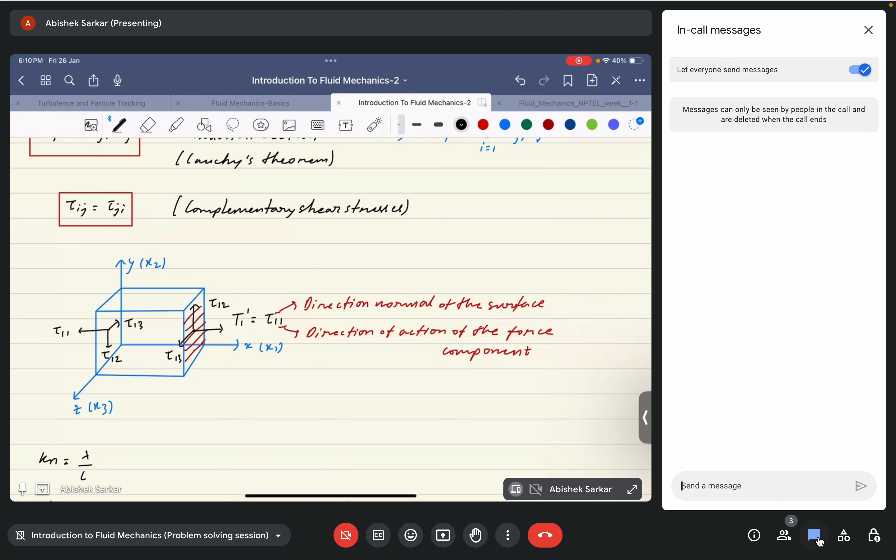So, to begin with, Professor Chakraborty discusses the topic of... let me go back to the notes, I guess that would be better. Okay, yes, so here you can see that...

For the beginning, Professor Chakraborty has discussed the concept of continuum hypothesis, which basically helps us to consider the fluid as a continuum. If we dive deep into the physics of fluid flow, we can consider fluid to be comprised of various fluid particles. Fluid particles basically imply an accumulation of certain fluid molecules that would comprise a particle small enough to mitigate the errors that may arise because of its largeness.

If the fluid particle is much larger than the size chosen for our calculations, say the calculation of intensive properties such as density, mass per unit volume, then the size of the fluid particle should be small enough so that errors related to measurement of densities are mitigated, while also being large enough so that the continuum hypothesis is satisfied.

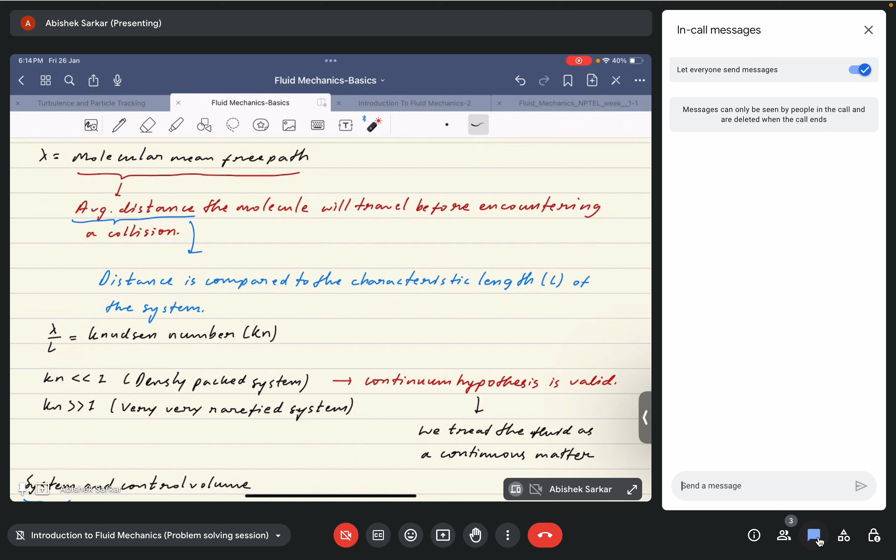The mean free path, or molecular mean free path, refers to the average distance that a fluid molecule will travel before encountering a collision. The characteristic length scale is the length scale of the flow that governs flow properties such as velocity and pressure. It could be defined as a length scale along which there is a considerable change in the velocity of the flow.

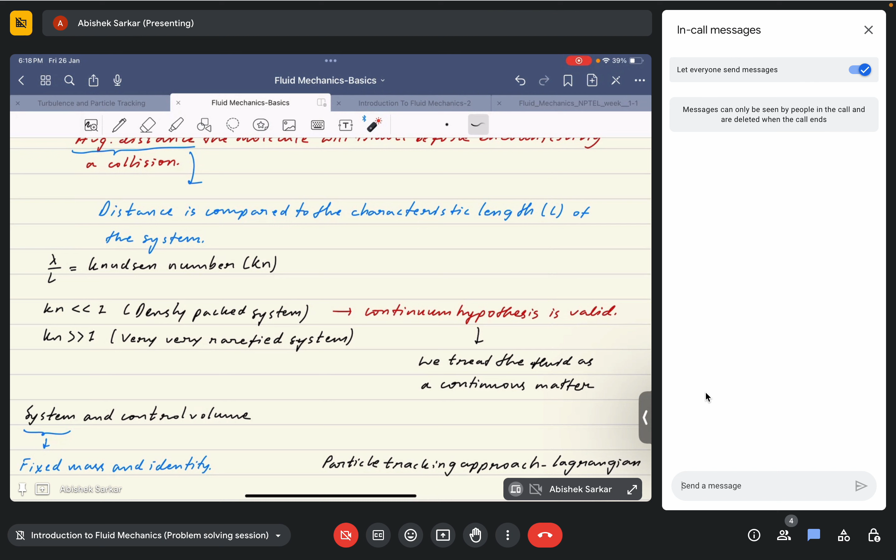For example, when dealing with experimental analysis such as flow over an aircraft, if you want to model that flow in a laboratory, it's very difficult to replicate the entire large scale experiment there. It's very difficult to create an aircraft of the size we usually use for traveling and design or replicate that large scale plane under laboratory conditions. So what researchers actually do is create a smaller scale model, and use that model to understand the flow physics of the flow over an aircraft.

But since the flow physics or scenario has changed because of the change in the scale of the experiment, the equations that govern the flow physics also have to be changed accordingly to account for this difference in scale. And that's why, in order to incorporate these differences while keeping the flow physics we're studying the same, people use the non-dimensional form of the governing equations, which give rise to non-dimensional numbers. One of those is the Knudsen number.

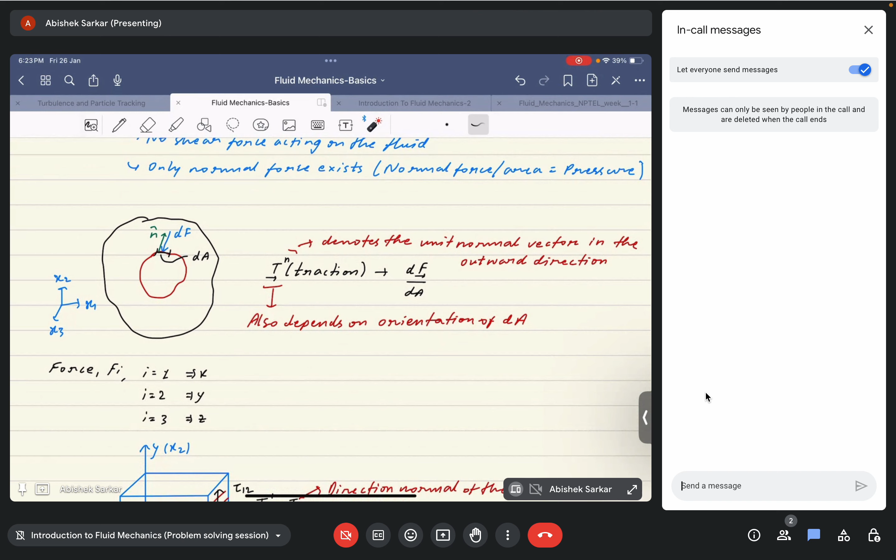I guess I can directly go to the notes now. So if we look into this definition of the traction vector discussed in the lectures: here, i denotes the direction of the traction vector along which we want to find the traction vector, and j denotes the corresponding components of the stress tensor that contribute to the traction vector in that particular direction. This definition of the traction vector is also known as Cauchy's theorem, as recently discussed by Professor Chakraborty.

Now I feel we have discussed enough, and it will be wise for us to directly go to the problems so that it could help you understand the concepts even better. So let us directly go to the problems.

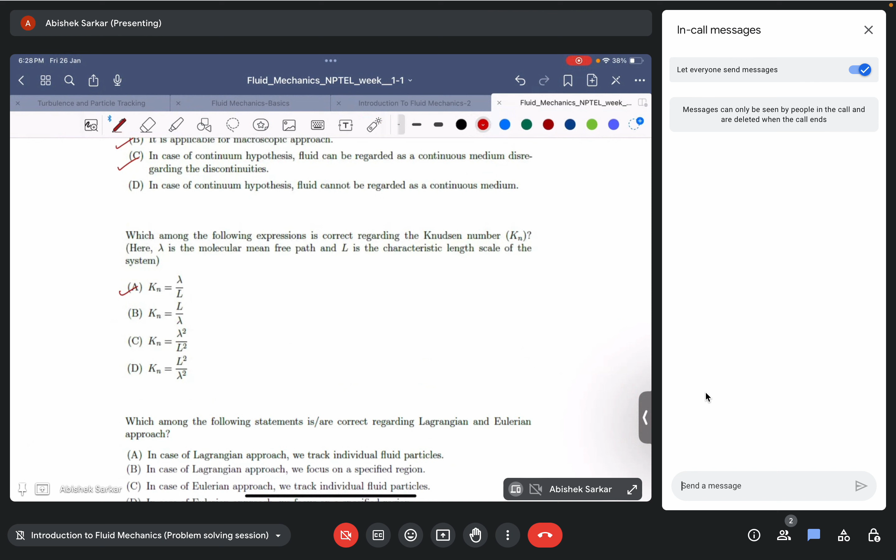Let's go to the next question. It is asking which among the following statements is or are correct regarding the Lagrangian and Eulerian approach. Since the question has arisen, I can take some time to discuss the Eulerian and Lagrangian approach. But students are most welcome to give their answers too. Still, I would like to discuss a bit about the Lagrangian and Eulerian approach.

So in this case, the correct answers would be A: in the case of Lagrangian approach, we track individual fluid particles, and secondly, option D: in the case of Eulerian approach, we focus on a specified region. That would also be correct. These are basically the definitions of the Lagrangian and Eulerian approach.

But still, I guess we can discuss these a bit. As mentioned here, in the Lagrangian approach we track individual fluid particles. What it is basically trying to imply is that both Lagrangian and Eulerian approach are two different methods to study a fluid flow system. In the case of Lagrangian approach, it is basically the control system approach — by control system I mean the system of fluid flow that we are going to study is fixed, and it is of fixed mass and fixed identity.

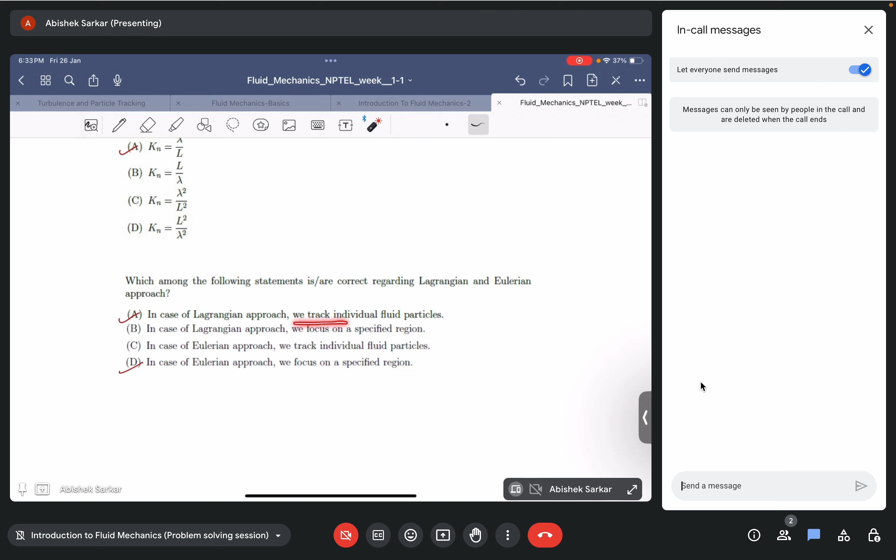I guess it would be much better if we described it with the help of a diagram. Consider that we have a particular box, that is our geometry. Let's consider two identical boxes - the size is different, but I hope you understand they are just identical boxes.

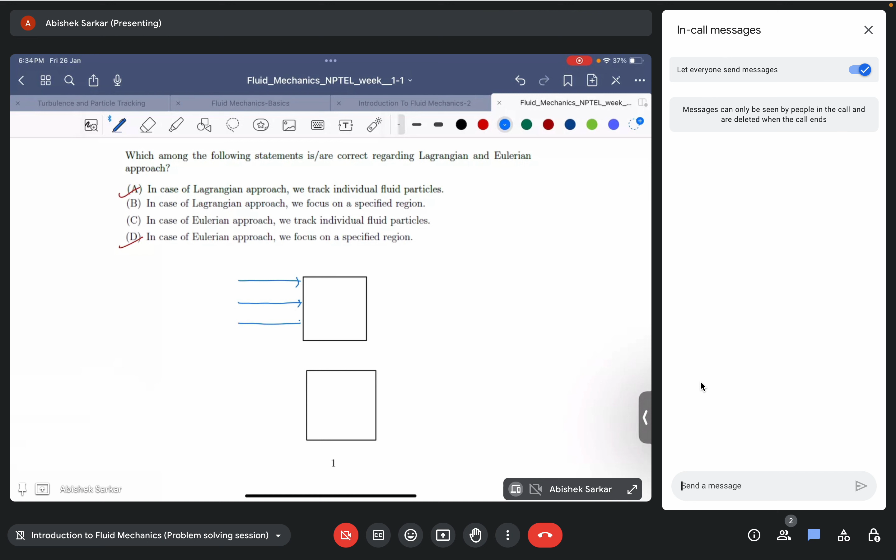As I mentioned, in the case of the Lagrangian approach, say there is a flow of fluid inside this box, this control volume, and there is an outlet. Here again you can apply the continuum hypothesis, meaning these are not different streams of fluid flow, but rather a continuous stream. These arrows just give the direction of the fluid flow we're going to analyze.

Let me just name them as inlet and outlet. This stream of fluid would have n number of particles - along this stream, it will be comprised of n number of particles.

Let me use a different color, say green. There will be n number of particles that come along with this stream of fluid, and these particles would go around with random motions, basically because of the confinement. This box you can consider as a hollow duct, which provides confinement to the stream of fluid. Since this is a solid boundary, these particles would collide with the walls of the duct, then jump back inside the stream, and may then collide with other particles, changing their direction again because of this collision.

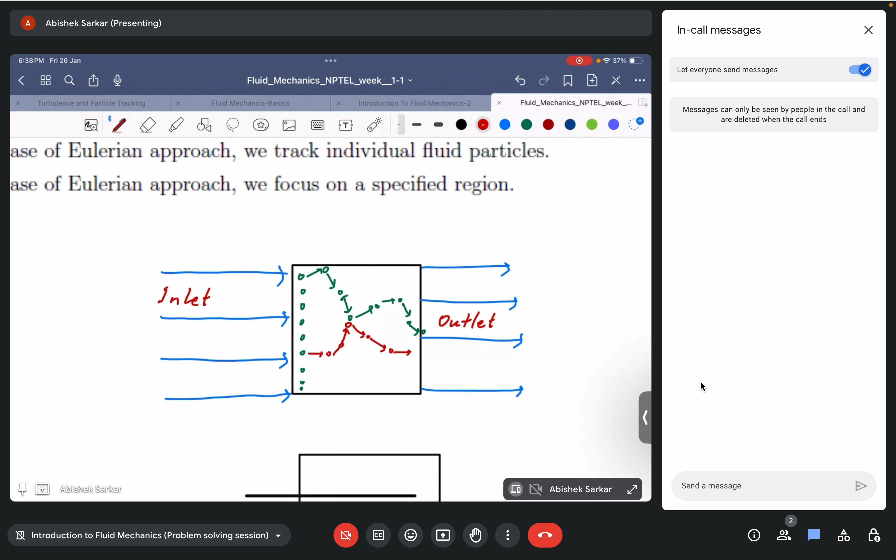Now it's quite clear why this approach is generally not considered suitable for basic fluid flow analysis. You don't want to scare any budding researcher by giving them such problems. They will just leave the field of fluid mechanics if they get to know this is the only approach available for understanding fluid flow systems.

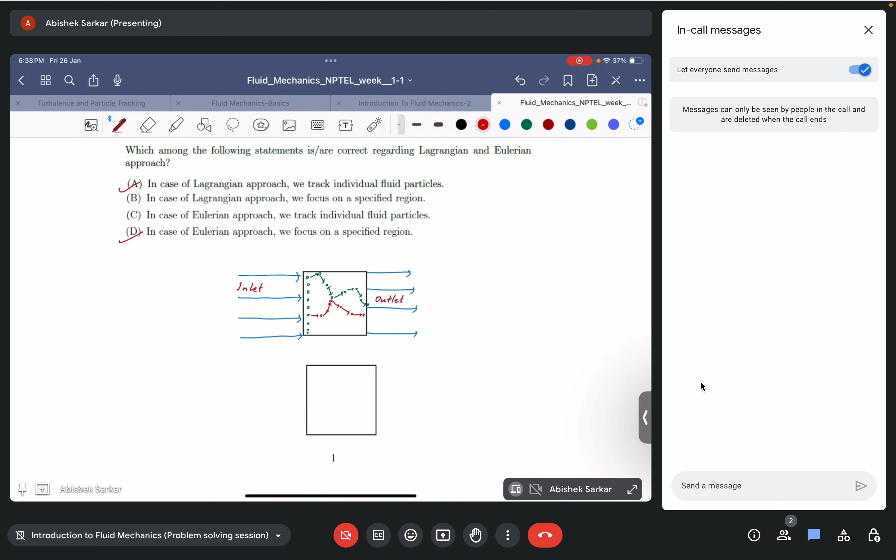And thus in order to counter this problem, fluid mechanics experts have devised another approach to study fluid flow problems, known as the Eulerian approach. I'll just write it here: Eulerian approach, and this is the Lagrangian approach. Let me just name them so it would be helpful. So in the case of the Eulerian approach, we consider the same system or same geometry.

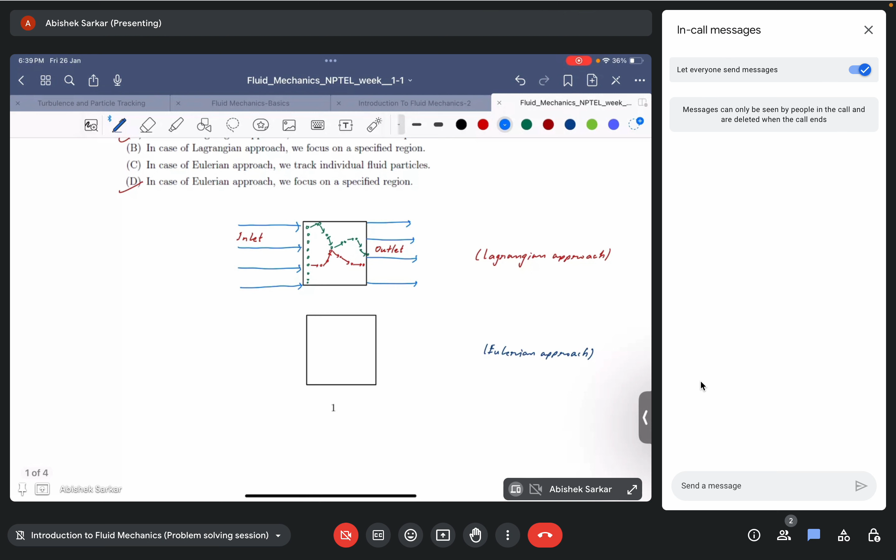Then again there is an incoming jet of fluid flow, an incoming stream. That would be a much simpler explanation. So again there's an outlet stream of fluid that we are considering. Let me just name them: inlet and outlet.

So in the case of the Eulerian approach, rather than focusing on a single particle or the same identity of the system, we are now more interested in a particular specified region. So even though the mass within the control system we are considering may remain constant, our identity changes because of the flow of the fluid, right?

Since the fluid is flowing past this particular duct or system, the identity of the fluid flow is changing because we are no longer concerned with a certain number of particles, but rather with a particular specified region of the flow, which we can specify by certain dotted lines. We are now more interested in this region rather than each and every particle of the fluid. So we are concerned with what happens to this region rather than the n number of fluid particles we were following in the Lagrangian approach.

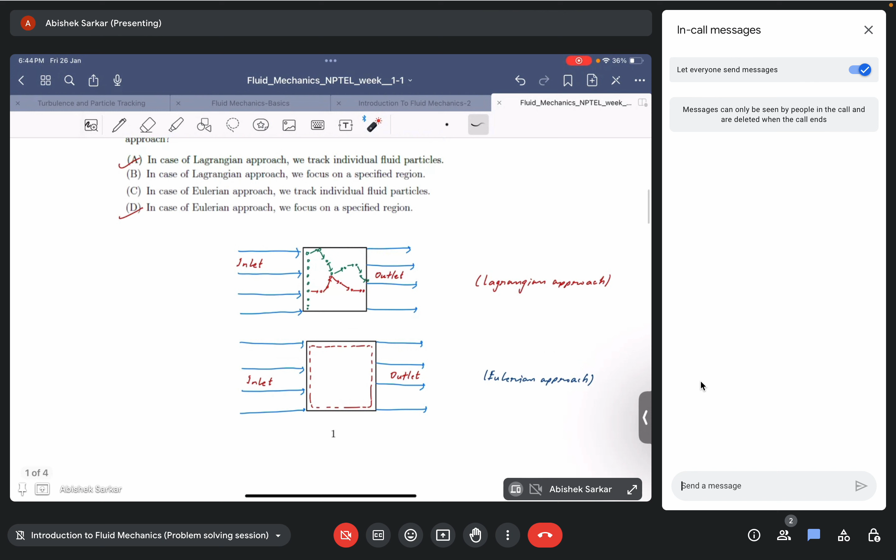So let's go to the next question. I guess it's question number 4.

Okay, so the question is, which among the following is the correct mathematical form of the angular momentum principle for a fluid flow in the absence of any body couples?

I think this is quite explicitly phrased, and this topic has been very thoroughly discussed by Professor Chakraborty in his lectures, so I don't think I will go back to derivations. I would emphasize that students go to the derivations if they do not remember, and see what assumptions he has taken to get to the final form of this statement, and what necessary conditions need to be satisfied.

So I guess the answer, all of you know the answer. The answer would be option number C, that tau ij is equal to tau ji.

This statement, if you have taken any solid mechanics course such as strength of materials, is also known as the principle of complementary shear stresses. I suggest you go back and look into it. Even though in that case we discuss solids and here we discuss fluids, the concept remains the same. But I will still emphasize that you go back to the derivation for this equation in the lectures, so that it will be very handy for you to see how we reached this conclusion.

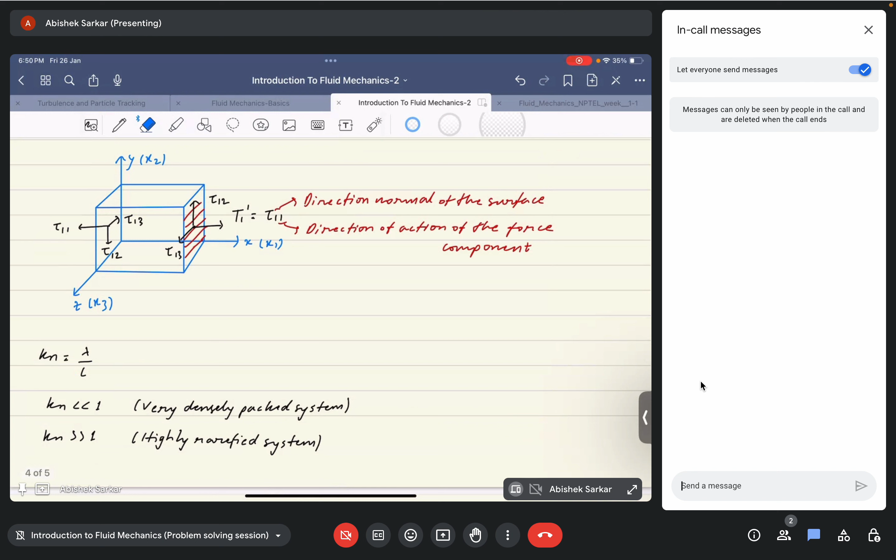So if I go back to the diagram, you can see here that if tau 11 is the particular stress component we're discussing right now, the first index denotes the direction normal to the surface, basically the direction of the plane that is perpendicular to the direction of the stress component we're trying to evaluate, and the second index denotes the direction of action of the force component.

Let me just take an arbitrary plane right now. Let me take this plane, and then denote the stress components, say this and this. I hope it is clearly visible now.

So if these are the three different stress components right now, the first component here, since this direction is perpendicular to the direction we are going to analyze, this plane is perpendicular to the y-axis, right?

So if y is denoted by the index 2, then the first index in this case would be 2, and since the direction of the force or stress component is along the y direction, the second index will also be 2.

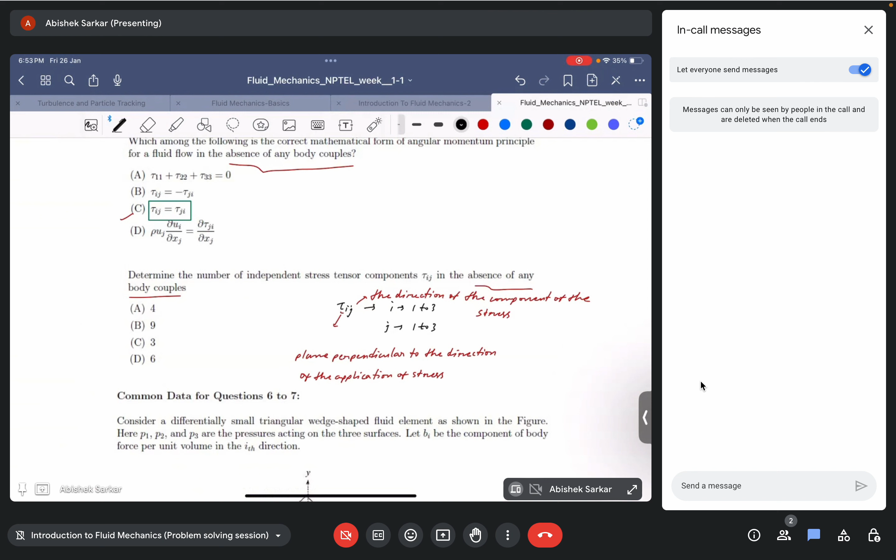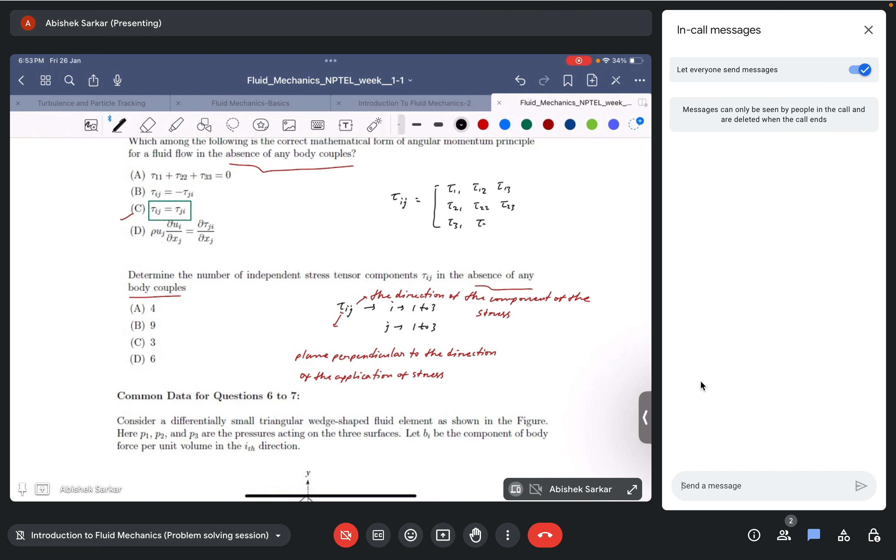Okay, so now if we are trying to write the stress tensor, tau ij could be written as tau 11, tau 12, tau 13, tau 21, tau 22, tau 23, tau 31, tau 32, tau 33.

And since this condition is satisfied, this would imply that tau 12 is equal to tau 21, tau 23 is equal to tau 32, and tau 31 is equal to tau 13, right?

Let me just use different colors. So these two are the same, this and this are the same, and these two are the same.

If we consider these as three different elements, this will comprise three components, and the remaining components are the normal components of the shear stress tensor, that is tau 11, tau 22, and tau 33. So 3 plus 3 tells us there are 6 independent stress tensor components in the absence of any body couples. So the right answer would be 6.

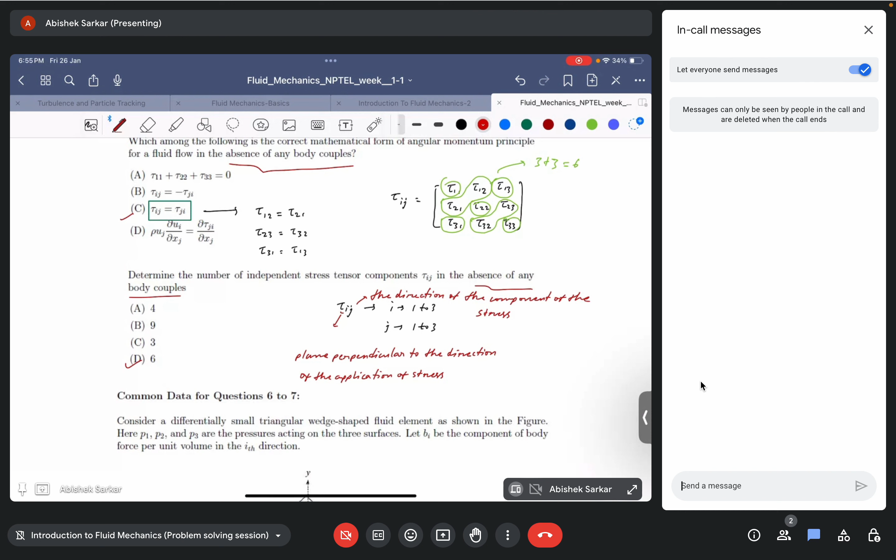Okay, I hope it's clear up to this point, so we can go to the next question right now. This question is again, I guess, quite straightforward. It's asking that we consider a differentially small triangular wedge-shaped fluid element as shown in the figure.

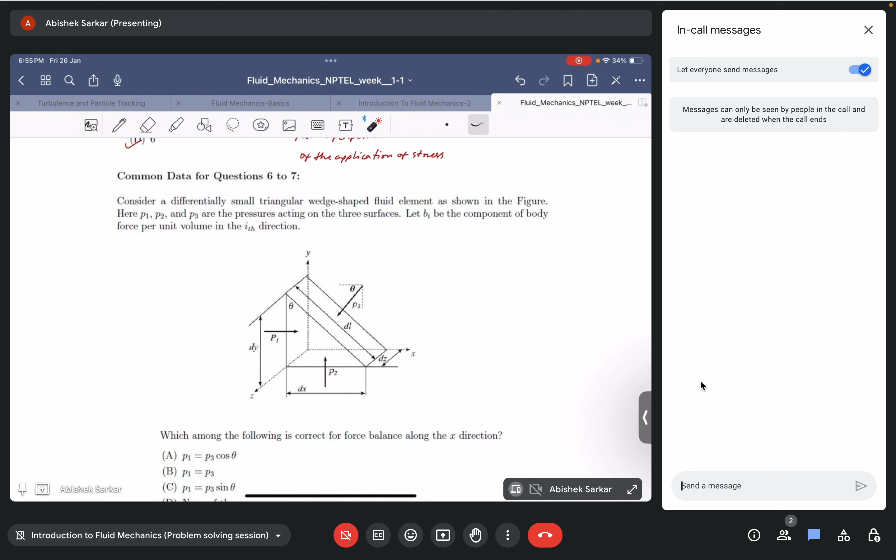Here P1, P2 and P3 are the pressures acting on the three surfaces. Let Bi be the component of the body force per unit volume in the ith direction. Then which among the following is correct for the force balance along the x direction?

So I guess this question is pretty straightforward, and Professor Chakraborty has extensively discussed this particular geometry and derived a particular law that we know as Pascal's law. He has done an extensive analysis of this elemental form of the fluid element, so I don't think I need to go back and derive the entire expression once again.

But here they have not even asked for the entire derivation. They have just asked for the force balance along the x direction, and similarly along the y direction. So we'll just do the force balance.

After doing that, we will see that the force balance gives us the conclusion that along the x direction, P1 equals P3, and along the y direction, P2 equals P3. That will lead us to the final conclusion that P1 equals P2 equals P3 for a very small differential fluid element. So that's the final conclusion.

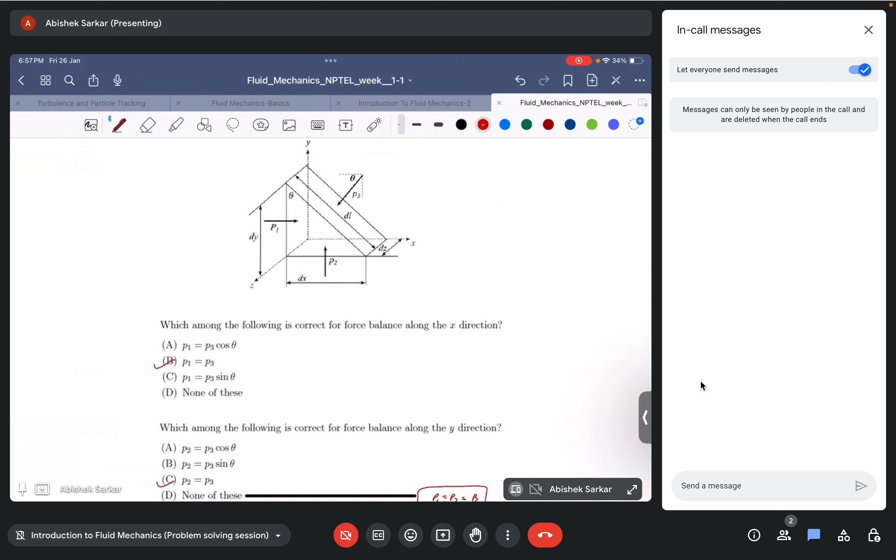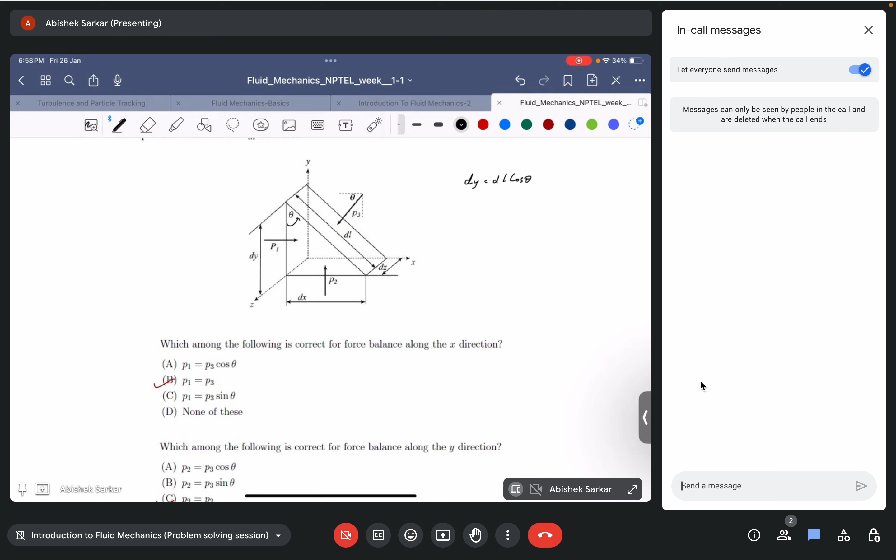Along the x direction, considering the length of this wedge-shaped part is dl, it tells us that dy would be equal to dl cos theta. From this expression, given this angle is theta, we can write that dy equals dl cos theta.

So the net force along the x direction because of pressure P1 would be P1 dl cos theta. Then the only component of force remaining to be balanced in the x direction would be the force along the x direction due to pressure P3.

Which would again be P3 cos theta, that is... basically we decompose the... actually I guess this is conceptually wrong to write like this, so let me not do it this way, as it would create further confusion.

It is the force that we decompose and not the pressure. So rather I will write it in this manner: the net force on this wedge-shaped element would be P3 dl. Let me just write it — it is P3 dl, the net force is P3 dl. So the component of force along the x direction would be...

P3 dl cos theta, and along the y direction would be P3 dl sin theta. Once we do the force balance along the x direction, we get that P1 dl cos theta would be equal to P3 dl cos theta. So cos theta cancels, dl cancels, and we get P1 equals P3.

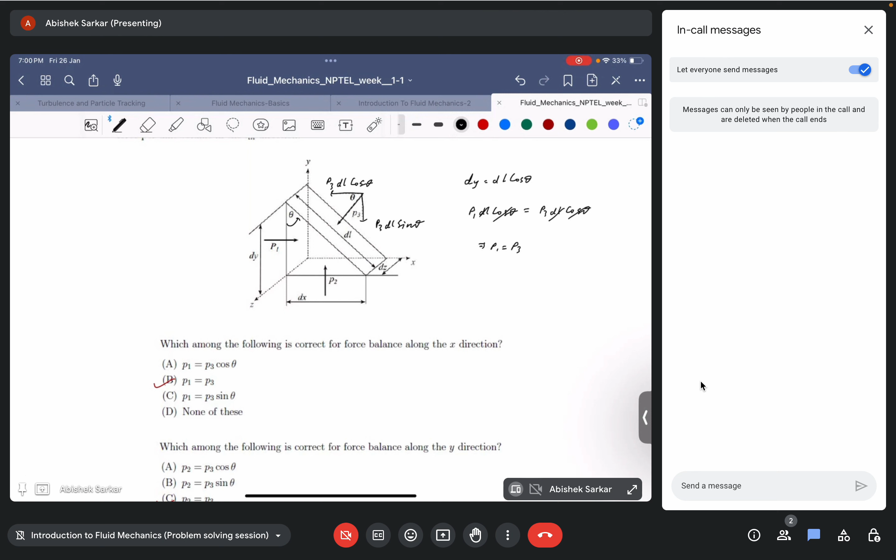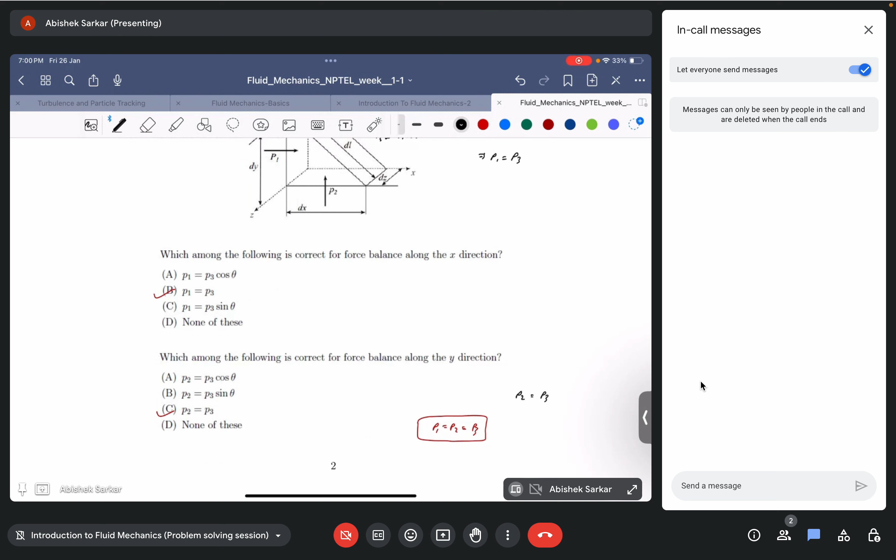A similar analysis can also be done along the y direction, which will give you P2 equals P3. Okay, let's go to the next question.

This is an interesting question, so we can discuss it thoroughly. It is given that we consider the two-dimensional stress field as shown in the figure. The plane AA, that's basically this one, is cutting through the element at a 30-degree angle as shown. So this angle is 30 degrees and this is the plane AA, and these are the stress components: sigma xx, sigma yy, sigma yx, sigma xy.

I guess if we try to understand the notation of these stress components, it will again be a revision of what we have discussed throughout this problem solving session. This is basically the sign convention or notation of the components of the stress tensor. If we look into it, say we consider this to be the Cartesian coordinate system for this particular problem.

Since this plane is perpendicular to the direction of the stress component we are trying to evaluate, the first index would be x. The second index is the direction along which we are trying to evaluate the force corresponding to this stress component, which is also along the x direction, so it will be sigma xx. Similarly, since the plane along which we evaluate the force remains the same, the first index stays x, but since the direction of evaluation has changed, it will now be sigma xy.

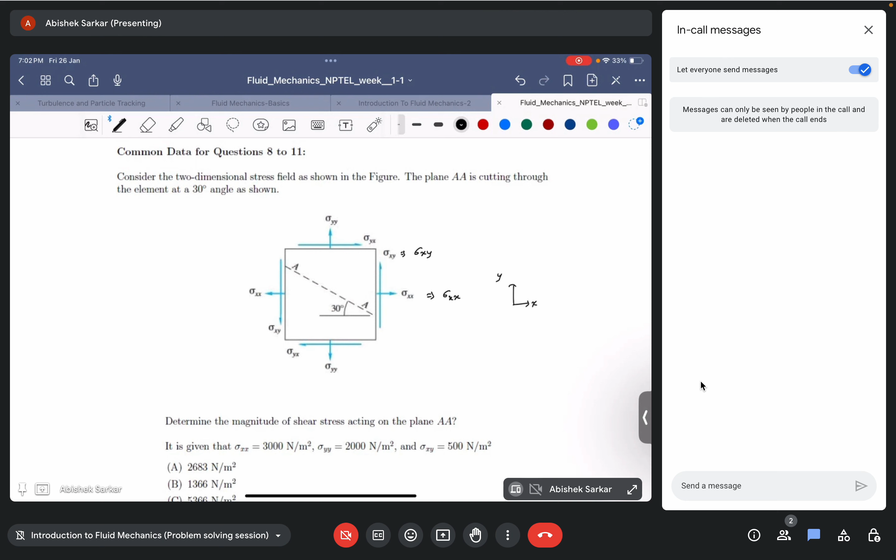The first question is to determine the magnitude of the shear stress acting on plane AA. It is given that sigma xx is 3000 Newton per meter square, sigma yy is 2000 Newton per meter square, and sigma xy is 500 Newton per meter square.

In these scenarios, it is quite a general practice to resort to force balance, assuming that the net shear force along that plane is zero, because there's no mention of any deformation due to shear force, so we can assume the system is in equilibrium. So the net force due to the shear stress acting on this particular plane is zero.

So we can do the force balance here, and let us go ahead and find the net shear stress that acts on plane AA.

I'm not saying the net shear stress is 0. What I'm trying to imply is that the net shear force that acts on this particular plane is 0, because there is no deformation of the element due to the application of the shear stresses. That's why we can do a force balance, because the system is in equilibrium.

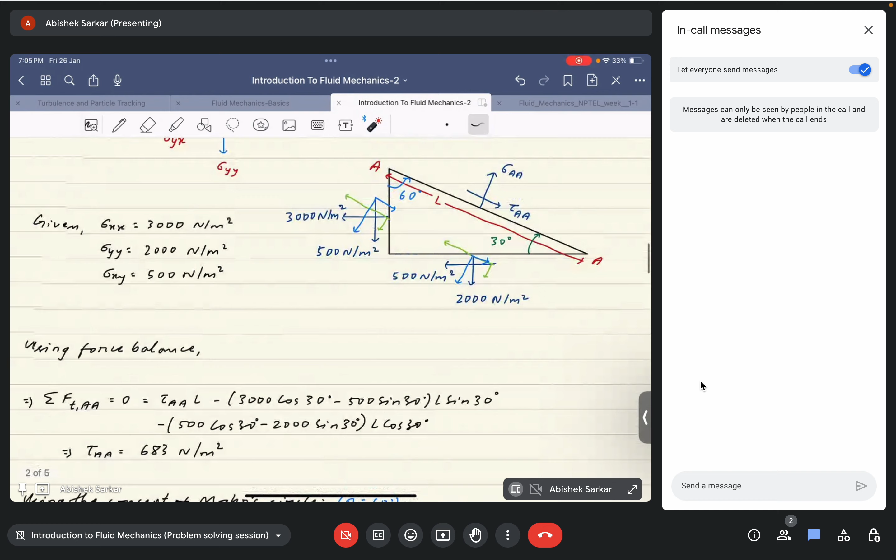Once we do the force balance, this is the diagram, a simplified view. We have denoted all the values of the shear stresses that have been mentioned in the question, and we do the force balance.

I suggest that you look at the force balance. If there's any doubt, you can ask me. I guess it's quite clear, but if you have any doubt, just ask me.

Since our plane is inclined at an angle of 30 degrees, what we have done is form two different axes that indicate the net shear stress and the normal stress. You can consider this to be the shear plane and normal plane. This is the plane we are concerned with, inclined at 30 degrees, so we consider a different axis or direction along which we want to balance our forces.

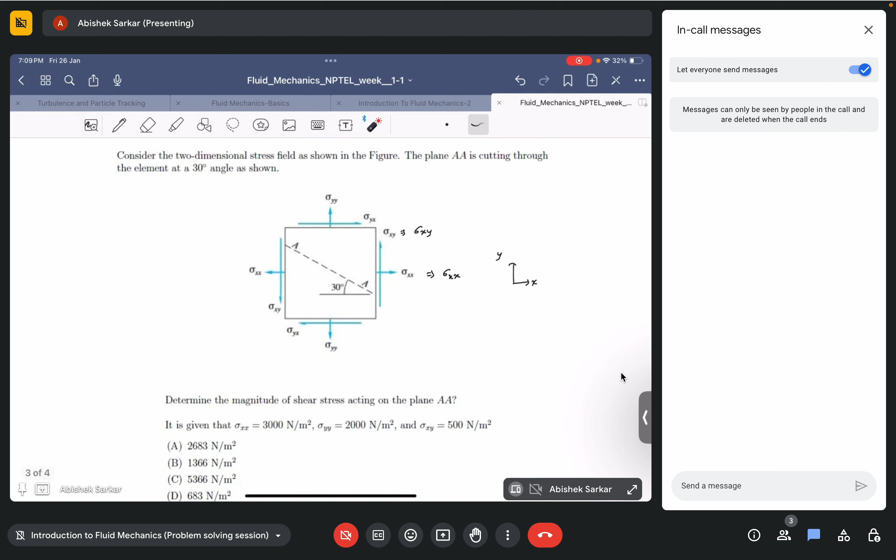The question is: consider a two-dimensional stress field as shown in the figure. The plane AA is cutting through the element at an angle of 30 degrees. This is the diagram we are considering, so I hope it's quite clear now. The question asks us to determine the magnitude of shear stress acting on the plane AA.

We need to determine the magnitude of shear stress that acts on this element AA. It's given that sigma xx is 3000 Newton per meter square, sigma yy is 2000 Newton per meter square, and sigma xy is 500 Newton per meter square. These are the corresponding stress components shown in the figure.

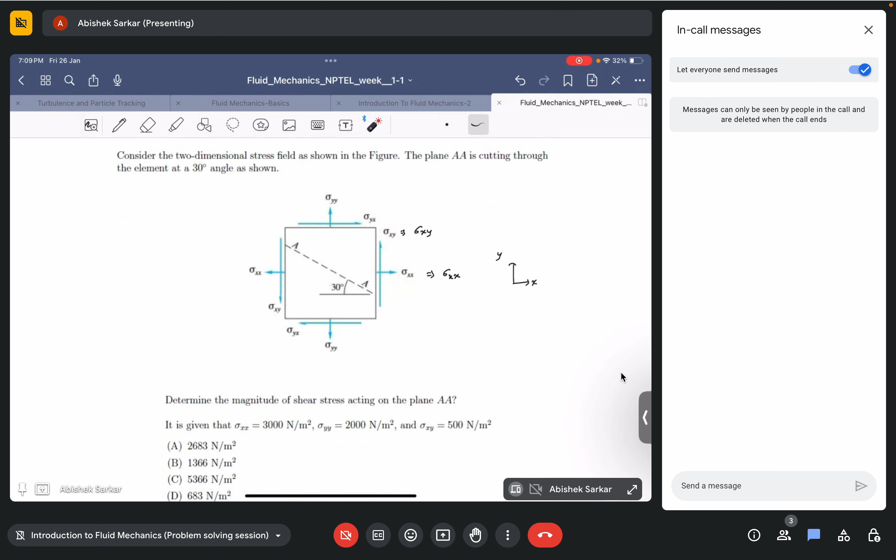In order to solve this, we take the help of force balance, which is what I was discussing in the different diagram. This is the particular wedge element we are considering, which comprises the plane of our concern, this plane AA. Since it is not mentioned in the question that the body is undergoing any kind of acceleration, we'll take that the net acceleration in the body is 0.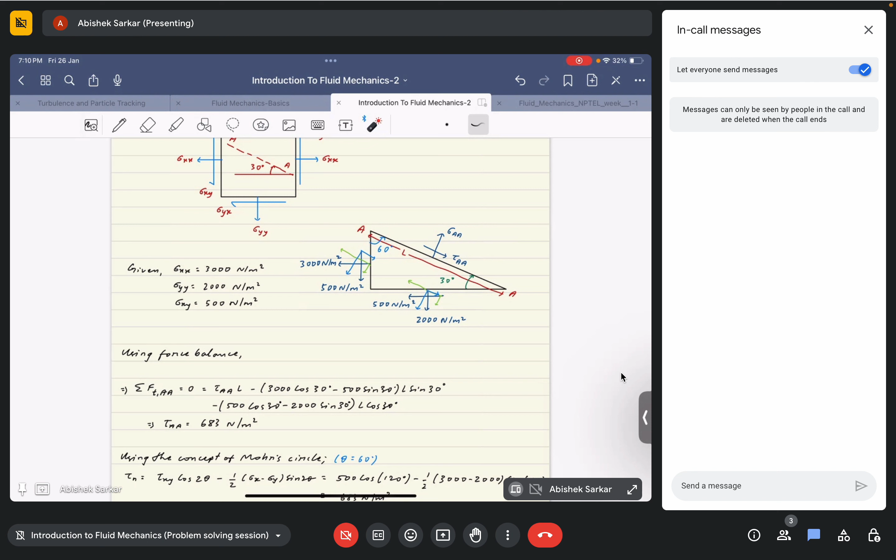Both the normal component of the force and the shear component of the force on this particular wedge element would be 0. The net normal force and the net shear force on this wedge element would be 0 — not the shear stress, but the shear force. That will be balanced.

What we do now is the shear force balance along the shear stress axis that we have mentioned. If we do that, we find that we can just write: if this has a length of L, then tau aa into L, acting along the positive direction of the shear plane.

Okay, it will be quite difficult to go through each and every term, so let me just go to the first derivation. It will be quite helpful. So it is along the positive direction.

This component, if we consider this plane, say plane A, B. In this particular surface there are two stresses: 3000 Newton per meter square and 500 Newton per meter square.

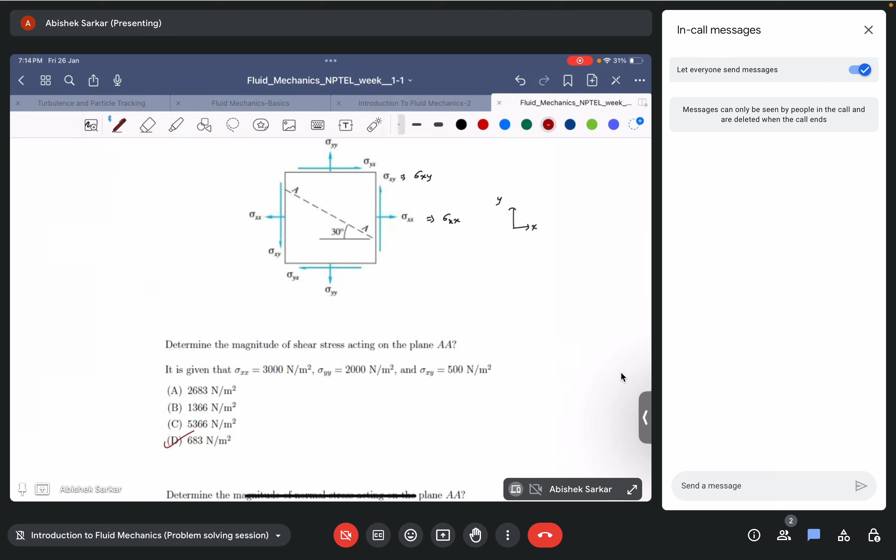Similarly, the next question asks to determine the magnitude of normal stress acting on plane AA. The values of the magnitudes of the stresses are the same, so you can directly go back to the same diagram.

I guess it is difficult, so let me just copy it to make it simpler. So copy and paste it here, a smaller version. We do the same force balance again, along the direction of the normal plane.

We'll do the same analysis. So sigma A into L would be 3000 sin 30, that's this component, plus 500 cos 30, this component, into L sin 30 degree. This plane is measured with respect to this length, similarly for these components of stress as well.

Once we do that, we get that sigma A is equal to 2683 Newton per meter square. So if we go back to the options, the right answer would be option A. Now I wanted to introduce you to solving this question using a different approach.

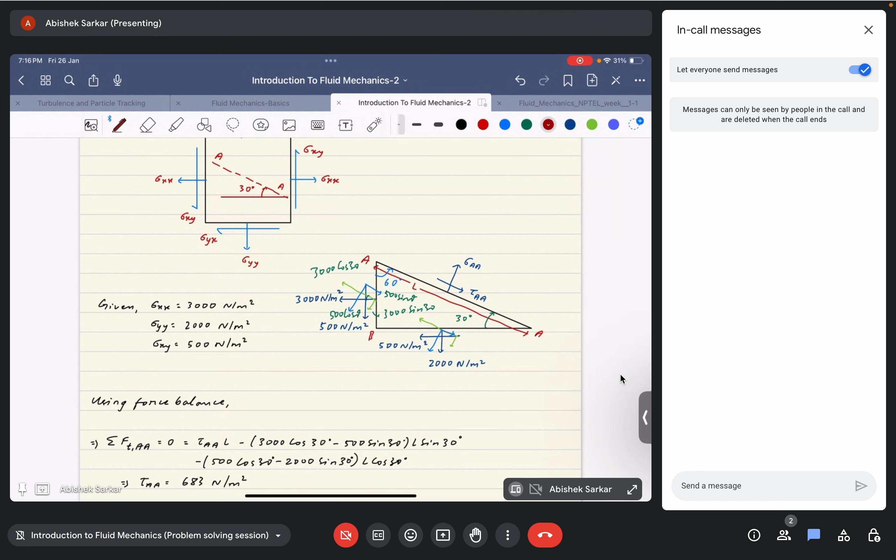If we go back to this diagram and this question in general, these kinds of analysis for finding the net normal force and shear force in a particular element are done extensively while evaluating solid mechanics as well. There, people use the concept of Mohr's circle to determine the value of these stress components, but there are also some analytical approaches to determine the shear and normal components of stress on a particular plane inclined at a certain degree.

Using that concept, we find that we can use this formula to find the stress component, the component of the shear stress. So this is the formula, you can remember it or take a screenshot. It's just a formula used in solid mechanics that I found applicable for this kind of scenario as well, so we can use that. But in this case, just for ease of understanding, we have taken the angle to be 60 degrees.

Angle of consideration is 60 degree, because since it is 30 degree and this is normal, so this would be 60 degree, right? So keeping that in mind, our theta for our analysis that we are using in the Mohr circle, it is 60 degree. Okay, and you know how the 60 degree came right here, right?

So the normal component of the shear stress is given by tau xy or sigma xy in this case, that indicates the shear stress that acts along the surfaces of the element. So tau xy cos 2 theta minus half sigma x minus sigma y sine 2 theta, and this sigma x and sigma y denotes the normal components of the stress that acts along the surface of the element. Okay, not the inclined surface, but the outer surfaces of the element.

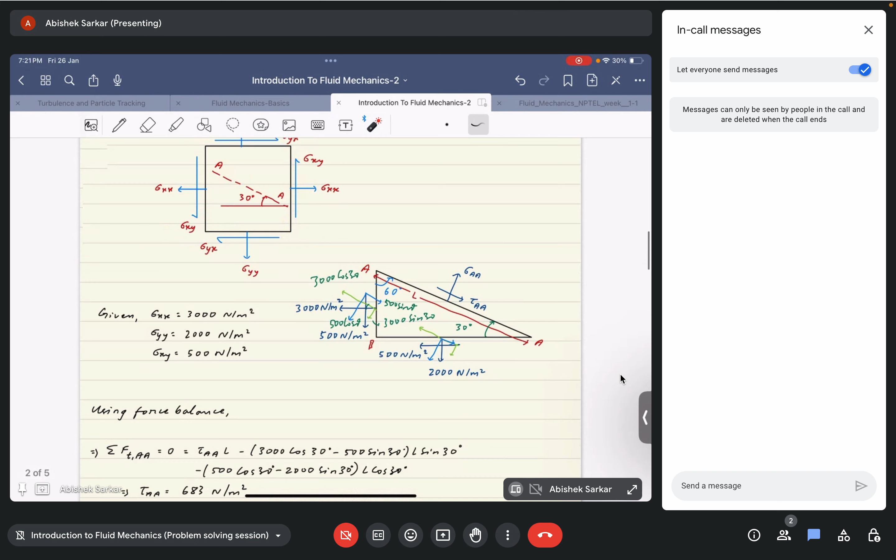So keeping that in mind, see, only the sign is different, but the magnitude is exactly the same as what we have obtained from our force balance.

Similarly, if we apply the same Mohr circle concept in the evaluation of the normal stresses, we find that we can use the same concept here. Theta would be 60 degree, and the formula for finding normal stress would be sigma n equals half sigma x plus sigma y, plus half sigma x minus sigma y cos 2 theta, plus tau xy sin 2 theta. Sigma x and sigma y are equal to sigma xx and sigma yy in our given diagram, and tau xy is equal to sigma xy.

Just substitute the value of the given stresses, then we find that sigma n would be equal to 2680 Newton per meter square. It is exactly the same as what we have obtained here. So these are just two different approaches or ways to find the same solution, but I found it interesting that we could apply the same concept here. Obviously we can apply it, but just wanted you all to know.

So now we go to question number 10.

So again, this is a simple force balance. We are asked to determine the shear stress sigma xy, given that sigma xx is equal to 2000 Newton per meter square, sigma yy is 3000 Newton per meter square, and sigma n, the normal stress along plane A, is 2500 Newton per meter square.